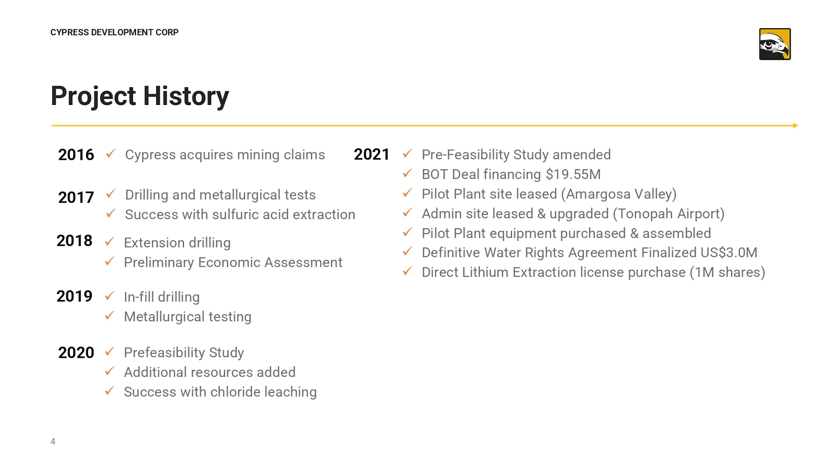And part of our pilot plant was that we acquired equipment from a company, Chemionex, out of Canada for direct lithium extraction, or DLE, which is essentially ion exchange. We did that license agreement in July, and that's now part of our pilot plant. This year we raised the $20 million. That's mostly still in the treasury.

We have a market capitalization of $240 million Canadian, and fully diluted we're about 150 million shares outstanding. We've strengthened our board of directors. We added Cassandra Joseph as our chair and Brian Disher to the board. We added Bram Jonker as our chief financial officer and Spiros Cacos as our VP of investor relations.

Now, I do want to mention here our primary consultant on design and assembly of the pilot plant, Todd Fayram from Continental Metallurgical Services out of Butte, Montana. He's been invaluable in bringing the whole plant together.

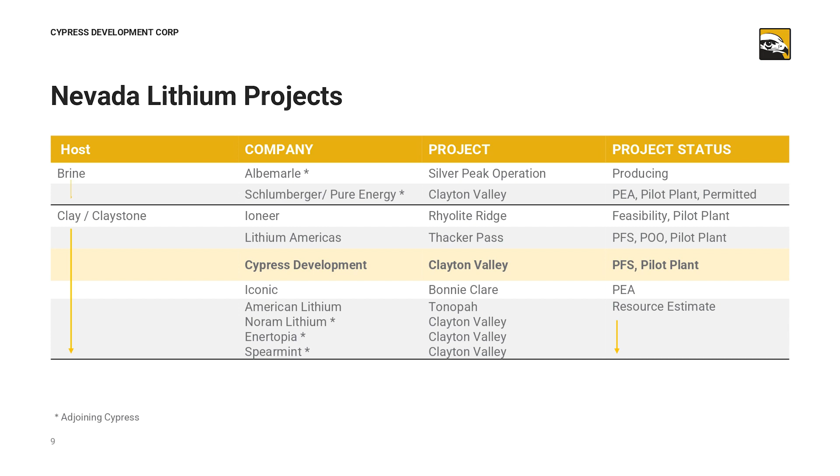There are a number of lithium companies operating in the United States. This slide shows the ones that are active in Nevada. Only a handful are at an advanced stage, and ours is the only pilot plant to be using hydrochloric acid and chloride leaching as part of the process.

Our project in Clayton Valley is 100% owned by Cypress. The land ownership belongs to Cypress, but with a 3% underlying NSR, of which we have a reasonable buy down for $2 million to a 1% NSR.

Again, this cash flow was based on leaching with sulfuric acid. Our project now is moving towards leaching with hydrochloric acid. One common question is, how do the economics change as we move from sulfuric acid to hydrochloric acid? We looked at this closely and found that there was very little change that we could see looking forward, but plenty of reasons for us to move to hydrochloric acid, both environmentally and operationally in handling the material.

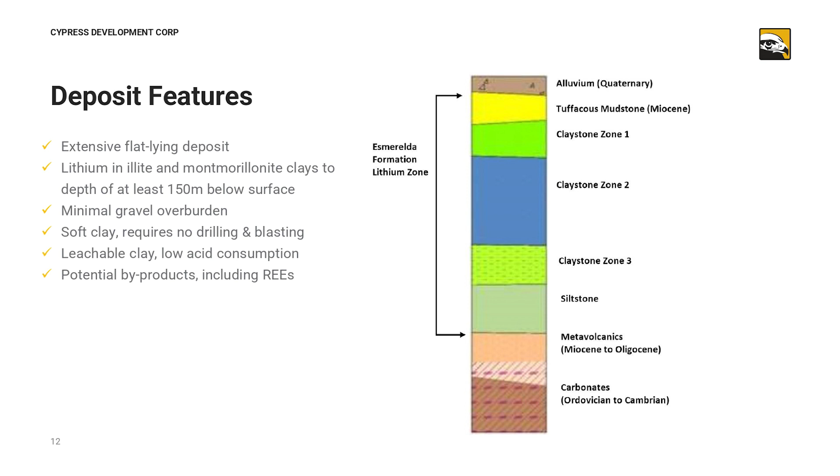Another question that we commonly get is, how can we operate a project which has somewhat lower grades than other lithium clay projects? Well, the reason for that lies in our deposit features. It's a thick clay which outcrops at the surface. It's uniform in its lithium grade. It's extensive and flat lying. The clay is soft. It requires no drilling and blasting. And compared to other projects, it has a relatively low acid consumption.

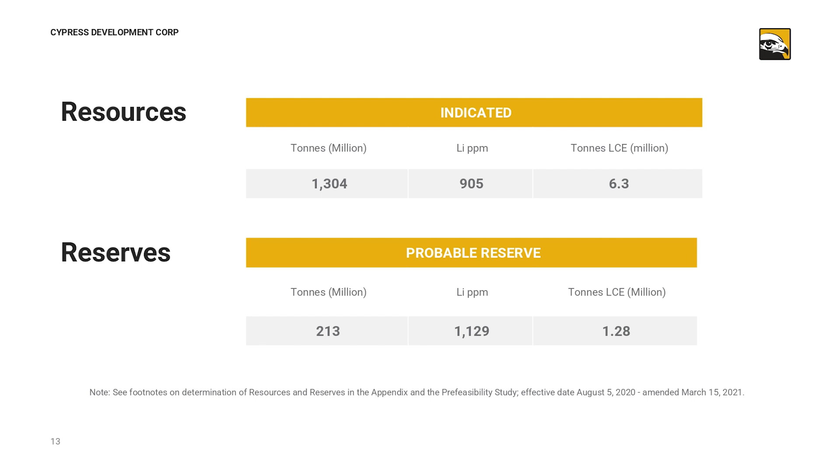We also have potential byproducts in the clay, which include rare earth elements. We have a large amount of resources relative to our reserves. Our resources are better than 1.3 billion tons, grading 905 ppm lithium. Our reserves are 213 million tons at 1,100 parts per million lithium, but that 213 million tons is adequate for a 40-year mine life at 5.5 million tons per year.

In this slide, we see a general arrangement from our pre-feasibility study showing the configuration of our open pit. The pit is shallow and elongate, which allows the use of conveyor transport to the mill. We also are looking at a tailings facility located to the south of the pit. One of the things we will be looking at in a feasibility study as we move forward is whether we can backfill a portion of those tailings into the pit as we mine.

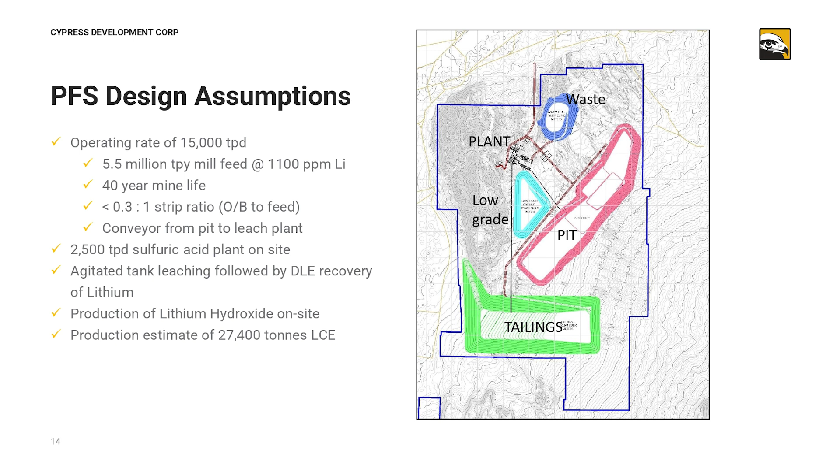In this slide, we're looking at the differences between sulfuric acid leaching and hydrochloric acid leaching. What we see is essentially our flow sheet stays the same. We're looking at the same basic steps of feed preparation, leaching, moving on to filtration, and some form of lithium recovery. When we move to hydrochloric acid leaching, that eliminates the need to truck sulfur to the site. That has its benefits and negatives. On the benefit side, we're eliminating the trucking of raw material, or roughly 800 tons per day of sulfur in the pre-feasibility case, but we also lose a cogeneration power plant.

In the hydrochloric acid case, we are now generating hydrochloric acid by bringing just input power into a saline solution, sodium chloride brine, and we're generating hydrochloric acid and sodium hydroxide. The sodium hydroxide then becomes our neutralizing agent in that solution, which allows us to look at other lithium recovery systems than what we did in the PFS.

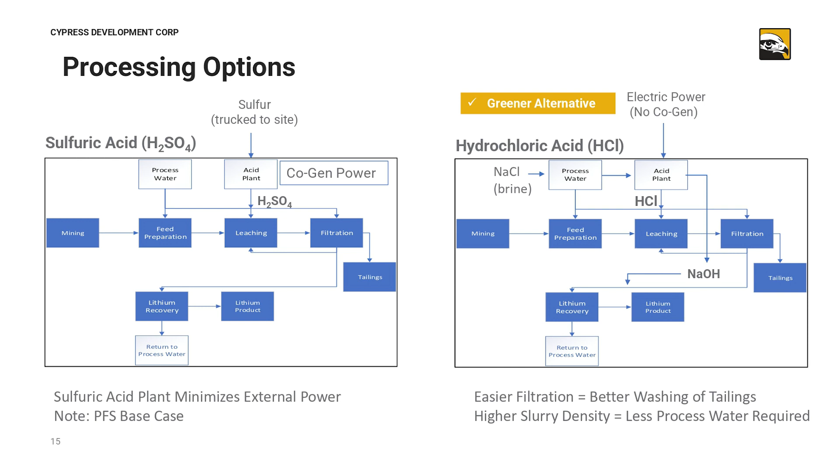This system also allows us better filtration, better washing of the tails, which should lead to higher lithium recoveries, and also means that we are able to work with a higher slurry density in leaching, which means we need less process water. That was instrumental in leading us to the decision to acquire the water rights agreement that we did this year. Here's our plant configuration that we have in the pilot plant.

It's relatively simple. We take our sample feed, run it into a main leach tank, into a thickener. From the thickener, we take our solids and wash them in a series of other thickeners which are running in countercurrent. The leach solution is then treated in a primary and secondary impurity removal step. That solution is then run into our Lionex lithium recovery system, which is the deal that we acquired this year with Chemionex. That solution then moves onward into a tertiary impurity removal step and then recycles back into leach.

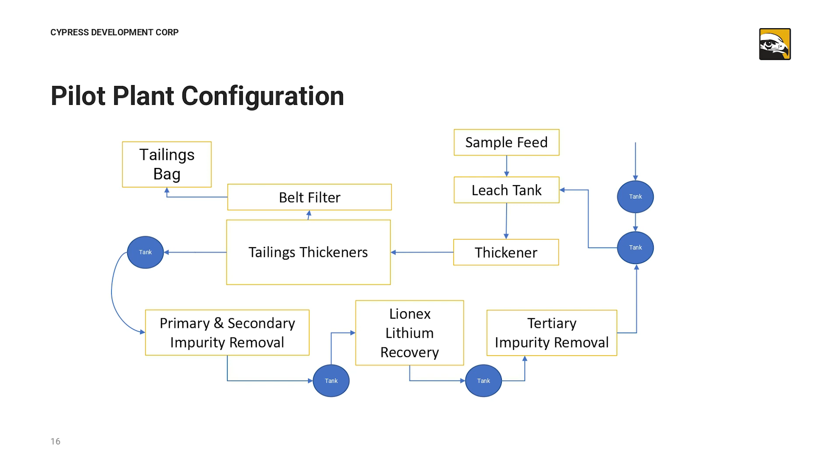One step in our pilot plant program, which is not shown on this slide, is that concentrated lithium solution from the Lionex area will be treated in Canada at NORAM Engineering. NORAM will take that concentrated lithium solution and produce lithium hydroxide with it.

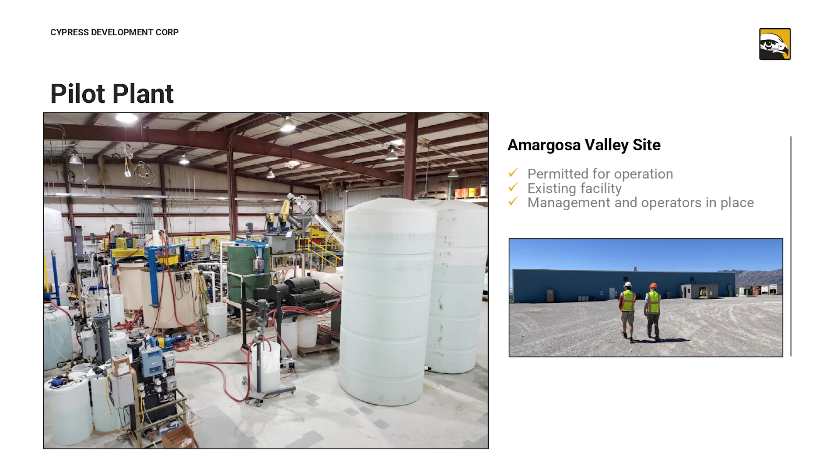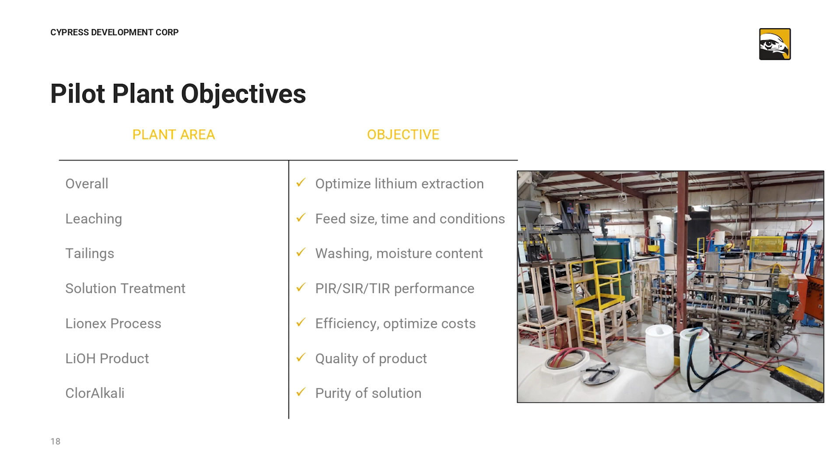We're able to work with this existing gold refinery for the pilot plant. It was a permitted facility. That helped us move forward and move our equipment and arrange it very quickly. We also have an experienced management and staff that was able to help in the assembly of the pilot plant. Our objectives of the pilot plant are to test and confirm the assumptions that we have in our studies, and also to optimize our process. Ultimately, of course, what we're looking for is the total extraction of lithium and how we can concentrate that and make a lithium product at the end of the day.

We are also very conscious of our environmental and social presence. We've done baseline studies. Our design in switching our processing approach is oriented towards minimizing environmental impacts, and we're also going to consider renewable energy in the process and how that might work into our eventual project. Our focus has been on effective use of land and water, and we have a commitment in Nevada to working with our local communities to build a sustainable operation.

In summary, we have a big project that has robust economics. Our company has been growing this year. Our pilot plant program is just getting underway. It's an exciting time here for the company, and our ultimate goal is to produce a sustainable, low-cost operation.

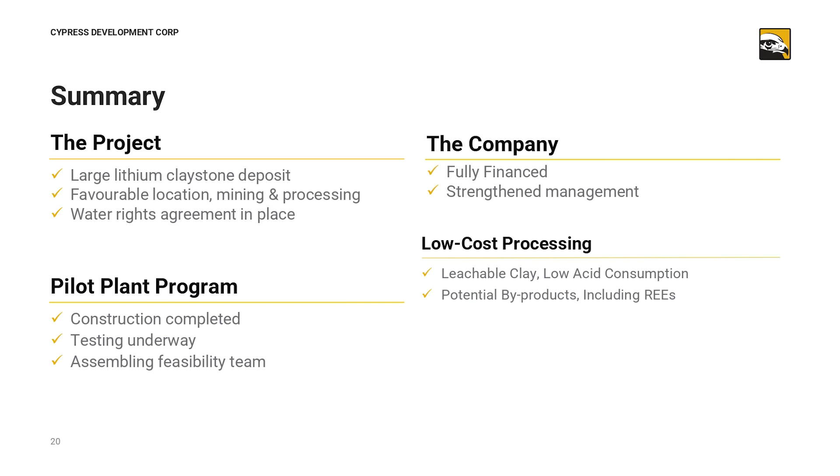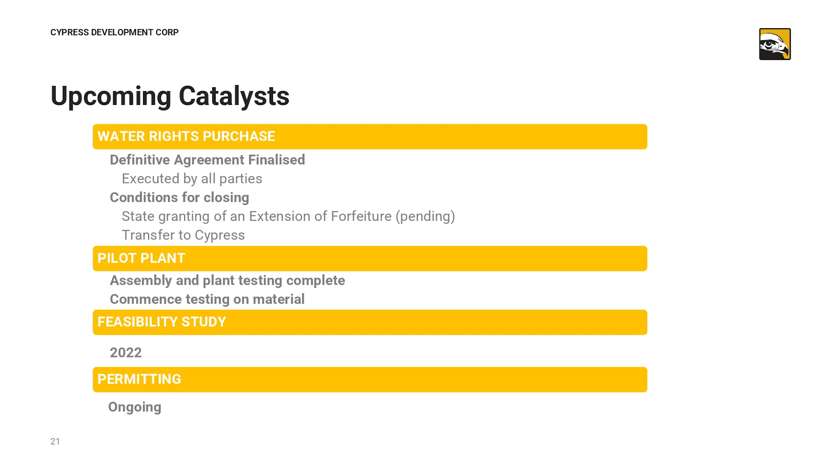Our upcoming catalysts: we're still working through the water rights purchase agreement. We have a final approval that's required from the state of Nevada, and that will then transfer that water right into Cypress's name. Our pilot plant assembly is complete, and we're processing fluids through the plant right now, and we'll soon begin testing on our clay material. And we're working towards that feasibility study and permitting, which we'll be carrying onward into next year.